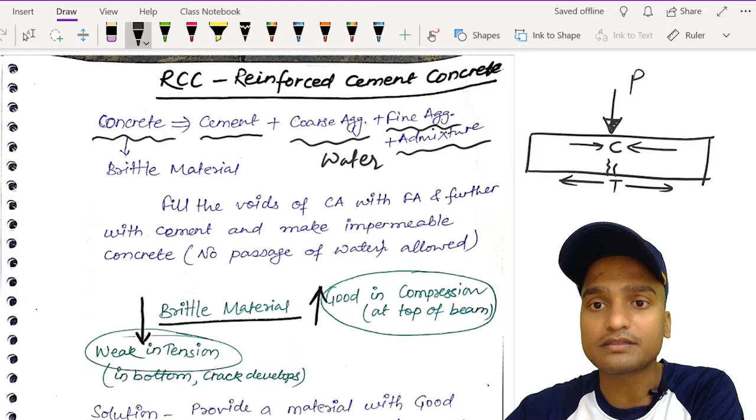So that's why, due to transverse loading, since concrete is weak in tension, some minor cracks start developing at the bottom of the concrete like this, and they start propagating towards the center. So this is the problem with concrete, and that's why we want to make it reinforced cement concrete. So at the bottom we provide the reinforcement bars of a steel which may be called as Fe415.

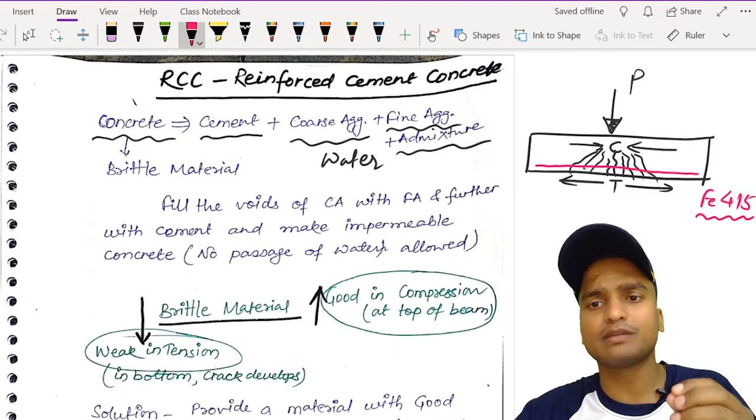If concrete is weak in tension and due to that at bottom cracks started developing, so the solution is that you have to provide a ductile material.

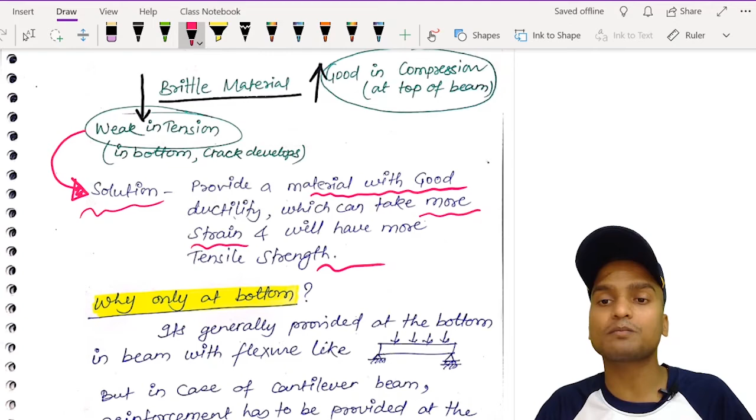So that's why we provide such a material and will have more tensile strength. Tensile strength का कहने का मतलब यही है कि कितना भी फोर्स लगा रहे हैं, it is not breaking like brittle material. It is undergoing a strain. That's why it has got more strength. Why only at bottom? I hope this must be very clear.

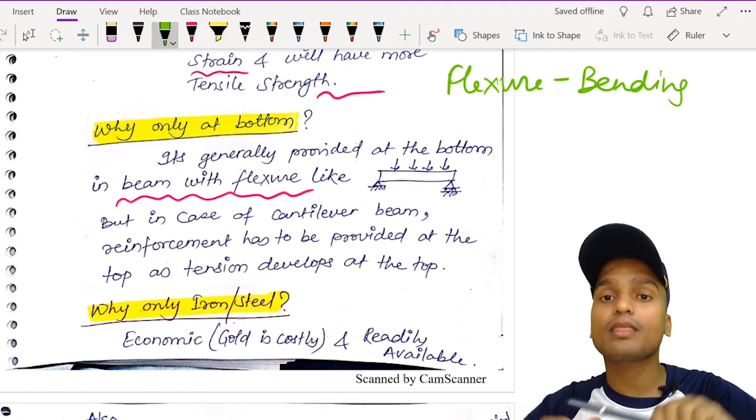We have to provide the reinforcement bar at the top of the beam, not at the bottom. And that is the case of cantilever beam. Cantilever beam क्या होता है? We all know that if this is my wall, cantilever beam is like an overhung beam.

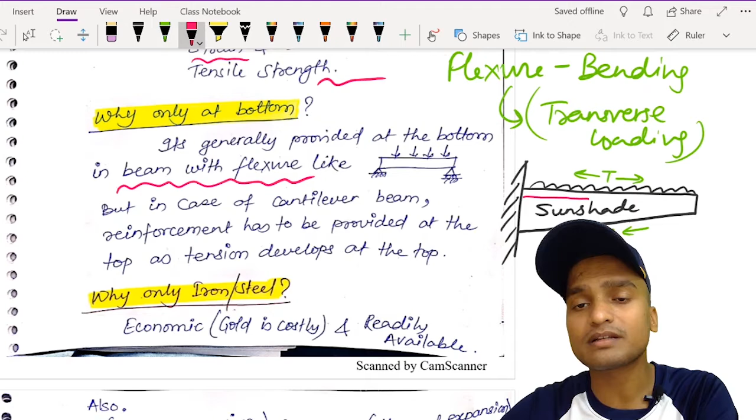So that's why in this case we have to indispensably provide the reinforcement bars at the top. So this is the only case where we have to provide the reinforcement bar only at the top, not at the bottom.

Now the next question that can come into the mind: why do we use only iron alloys or steel as reinforcement bars? The very first reason is that iron ore is the most readily available material on the earth's surface as a resource. And if some resource is available in abundance, then its cost becomes cheaper. And vice versa, if something is not available readily, its cost becomes very high. So we can't afford the other materials as reinforcement bars in concrete. So this is the first reason why we go for iron or steel as a reinforcement.

The second reason is much more convincing, because one mechanical property of concrete matches exactly with the same mechanical property of steel, and that is the thermal expansion coefficient. This is the quantity that relates the expansion or contraction of a material.

See, when you make a composite, what happens is two or more materials are there, and if their thermal expansion coefficients are not the same, then what happens if you heat them? I think you must have studied this in your 11th or 12th class. Suppose there is a steel specimen like this, and another specimen of copper like this. Both have different thermal expansion coefficients, and if you heat them, alpha of steel is not the same as alpha of copper, then what happens? So this is the deformed shape of the bimetallic strip at T plus delta T degrees Celsius. It has deformed into a curve. You can see it. This is because the alpha values are not the same for both materials.

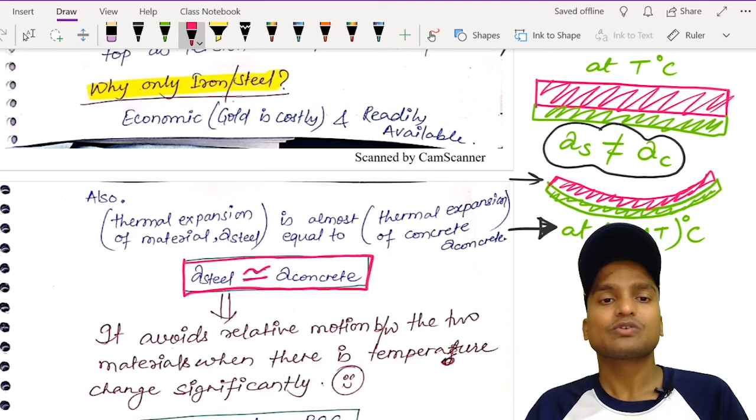So there starts development of relative motion, and relative motion is the cause of development of cracks. But in the course of design we understand how much steel we have to provide in a cross section, seeing the load, the material and the cross-sectional size. So we understand how much we have to provide. So the value of alpha steel and alpha concrete is the same, so there is no relative motion between the two materials, and that's why both can act as good constituents for development of a composite like RCC.